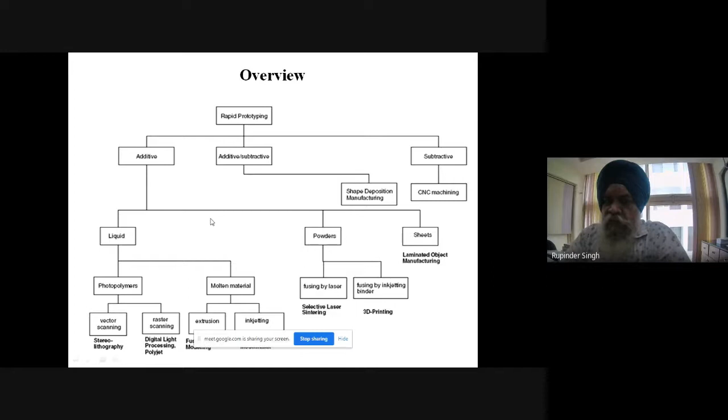These are some of the overlapped words, but basically rapid prototyping is categorized into three types. One is additive type, another is subtractive type, and the third is the combination of additive and subtractive, right? Let us say I am interested in developing some patch as a substrate for 3D printing. I can make it with some additive process. I can make it with some subtractive process, which is very common.

Subtractive means I have a larger block of material, like some of the imported materials we are working on, and I cut it according to my requirement. So that is subtraction, right? Or I can add some material layer by layer, joining it, or there can be the combination of additive and subtractive. So broadly, prototyping or rapid prototyping is subcategorized into three types: subtractive, additive, and combination of additive and subtractive. And there are a number of technologies further in these categories of additive, combination of additive and subtractive, as well as subtractive.

If I typically talk about subtractive manufacturing, which is quite common from the last 4 decades, this involves NC and CNC machines. I think all the engineering colleges or polytechnic colleges across the world are using this CNC or NC machining. Even the medium scale or small scale industry is working on this. Either I am interested in a mechanical product or in some hybrid product, electronics based, electrical based. This is very common, right?

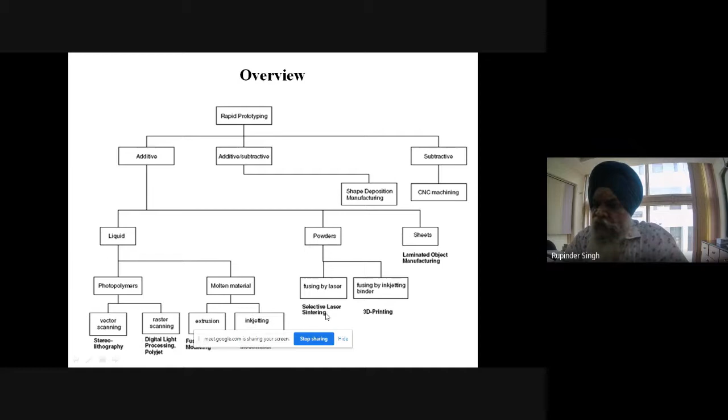If I talk about additive, it may involve technology based upon layer by layer deposition using some liquid base, some powder base, or some sheet base. And there are a number of technologies under this like stereolithography, digital light processing, inkjet printing, fused deposition modeling, selective laser sintering, LOM, laminated object manufacturing, 3D printing. So there are a number of technologies. And if you see broadly, we have more than 30 commercial 3D printing based technologies which are really competitive, and they have already defined applications, one or two, which can be really used for some typical applications, right?

So for the beginners, this is just the overview. In a typical 3D printing process, I have some data which is in the form of a CAD file. That file is given to some machine which I am calling a 3D printer. It looks like a photocopier, and the output of this 3D printer is a 3D printed object. Now, this 3D printed object can be a functional part, it may be a non-functional part, it can be used for n number of applications. Nowadays, I think there is hardly any field which is not using the benefit of this 3D printing.

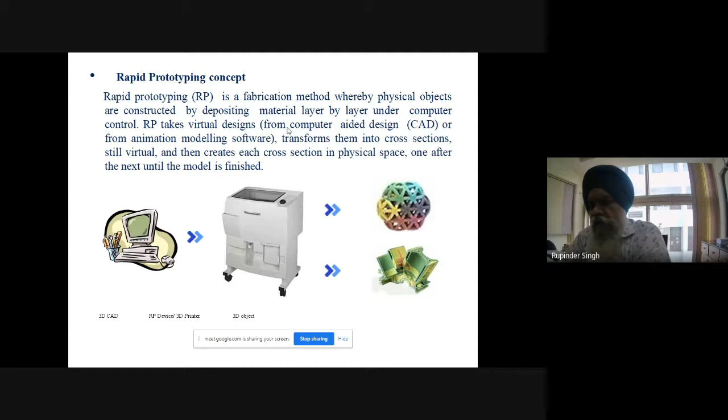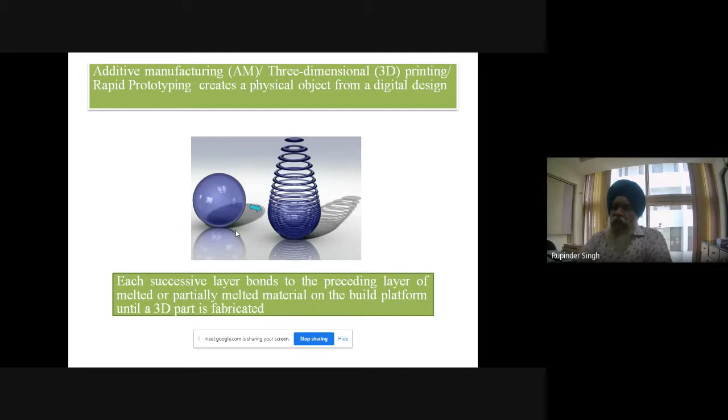So by definition, I have material deposition layer by layer using some CAD model, and then I transform this into some cross sections which are still virtual, and then these cross sections are deposited in a physical space one after another till I get a finished product. So this is another diagrammatical representation. So additive manufacturing or 3D printing is basically a digital design. I deposit layer by layer, and finally I get a 3D printed part. Here the successive layer bonds to the preceding layer, in partially melted or fully melted form. Then we have a build platform till we get a 3D printed part, right? So this is, I think, quite common. We are really comfortable with 3D printing.

Am I clearly audible, please? Am I audible? Dear friends, is it audible? Yes, sir. Yes, sir. Okay. You are audible, sir. Okay. Thank you. Yes, sir, audible, sir.

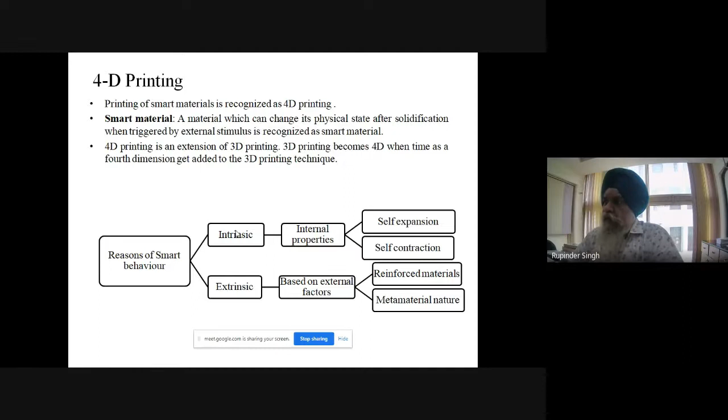Great. Okay, now we see the little extension of 3D printing that is called 4D printing. Nowadays we are even talking about 5D printing and 6D printing. Why am I talking about these? Because we are going to use these basic things for the development of some sensors, which typical electronics people call an antenna, right? Now, what is 4D printing? 4D printing is basically the printing of some smart material. This is basically 3D printing only, but the 3D printed part, under the effect of some stimulus, behaves in a way that it may grow, it may shrink, like that.

To understand this in a simple way, let us take the example of a sunflower. In nature, there is a sunrise, and the sunflower always faces towards the sun, and as there is a movement of the earth around the sun, the sunflower always faces towards the sun, right? So that means there is some stimulus which is in the form of sunlight.

So once that stimulus is put on that object, which is a sunflower, right, because of that stimulus there is some angular movement, there can be some up or down movement. Similarly, there are some flowers in nature which open up during the period of sunrise. So once there is a sunset time, again it closes down, right? So this is a very common feature. So that means nature is also inspired by different stimuli.

So if I select a particular material and a suitable stimulus, I can control the movement, I can control the dimension, I can control maybe the color, I can control maybe some other parameters like smell, something like that. So what we are interested in is, if I print some 3D component, and then as a function of time, as time is passing, I am using some stimulus. That stimulus is either helping it to grow or to expand or contract or change in color, change in angle, some angular movement can be there, right?

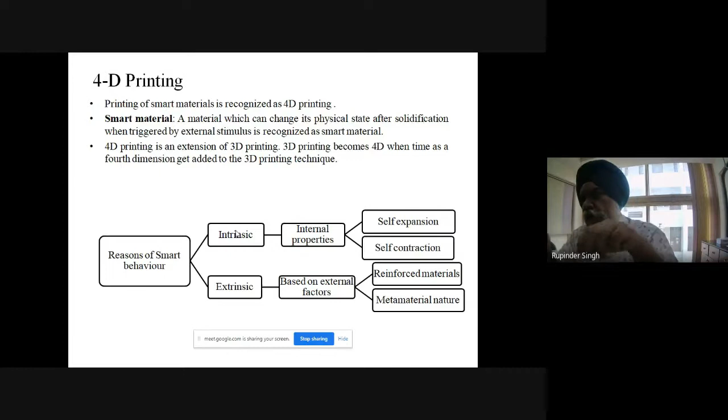Let us suppose I printed a 3D printed part. Now I apply a stimulus. The stimulus for this material is the voltage, right? So once I apply a voltage, this PVDF material is converting from alpha phase to beta phase. So what is alpha phase? Basically, it has a carbon-carbon chain, and alternately there are hydrogen and fluorine. So once I apply a high voltage, what happens? All the hydrogens are aligned on one side of the carbon chain and all fluorine on the other side of the carbon chain. So this conversion is called alpha to beta phase conversion.

So once there is alpha to beta phase conversion, there is a development of some van der Waals forces. And once we have that case, we experience that there is a contraction. So similarly, if you again change the voltage to zero, it will again get converted into the alpha phase. So I have a stimulus in this case as a voltage, right? So that stimulus for this material is converting the material from one phase to another phase.

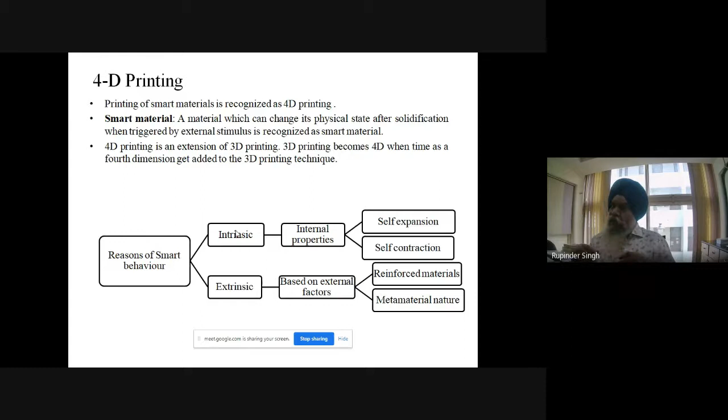Now just think of an antenna or a sensor where I can change the behavior. I can have a significant improvement in tan delta. I can have a significant improvement in its epsilon r, which will help in controlling the desired property of that particular sensor, right? So 4D printing is again printing in 3D only. After solidification, it is triggered by some stimulus, and we are getting some smart behavior.

So what I say, this is the extension of 3D printing, but we are interested in using a different type of stimulus. So what can be the reason for this smartness? There can be some intrinsic property of the material. There can be an extrinsic property. For intrinsic property, I have already explained the example of PVDF. In the case of the PVDF crystal, if you apply a load or a high voltage, it is converting from alpha to beta phase. That is the intrinsic property of the material, right?

Now, take another example. Let us say I am interested in thermal or electrical conductivity of polymers. That is actually not there, right? So suppose I want to add that property into the material. So what I do is some sort of reinforcement. I can reinforce graphene, I can reinforce some copper or aluminium powder, which helps me increase the thermal or electrical conductivity of the material. If we do something like that, this is basically increasing the property of that material through extrinsic means. So it is based on external factors. So the broad classification is intrinsic type and extrinsic type.

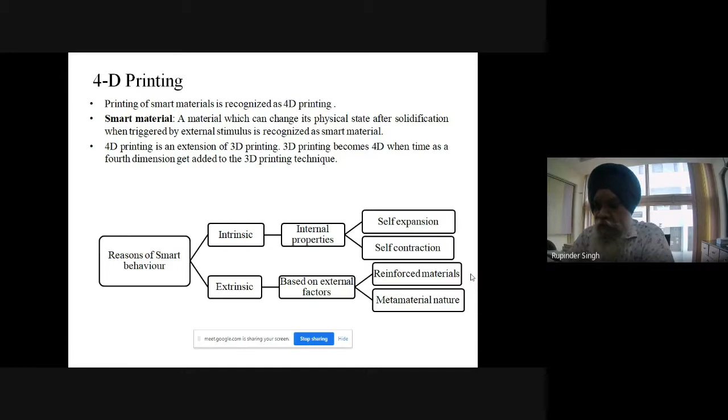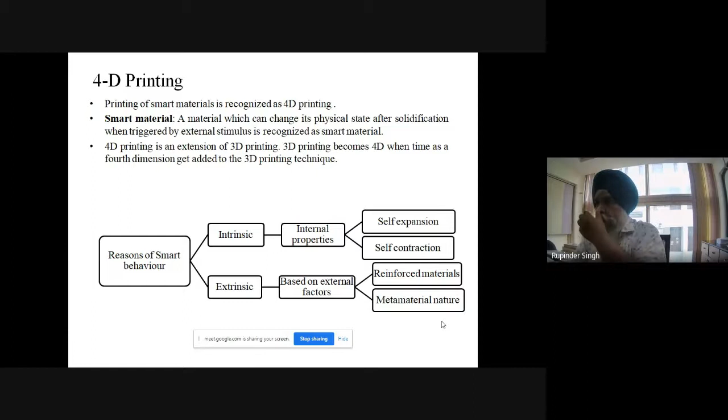Then there is another type of material called metamaterial. This may be a new concept for some of us, but it is quite common in civil structures. Metamaterial is basically an outcome of some angle and the length of the links through which some material has been developed or fabricated, and some component has been developed.

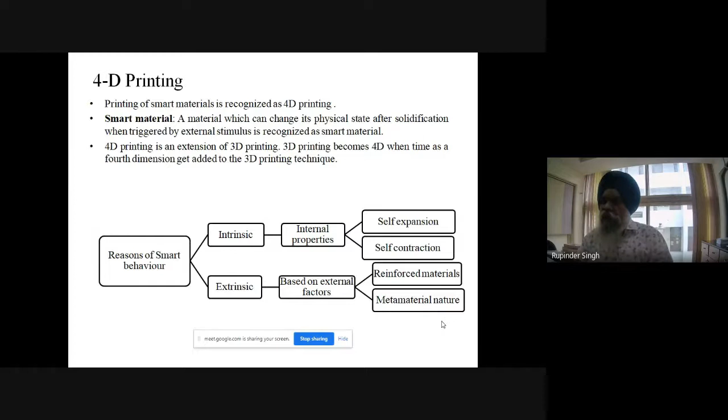Now the strength of that particular functional part is not because of the strength of the material, but how the material has been fabricated - what is the length of the link, what is the angle of the link. That is really important. Let me give you one example to understand this concept.

In some geographical locations where there is a lot of seismic movement and chances of earthquake, for the construction of multi-story buildings, they normally put in the basement some metamaterial mesh of material like titanium, which helps to absorb that large variation of earth movement, and the superstructure over it is basically safe.

There is a typical concept called origami structure - these are some Japanese concepts that have been used. Now the similar concept from civil engineering is being used for printing the functional part, so that it can absorb large vibration. Like you are interested in developing some sensor for high vibration applications.

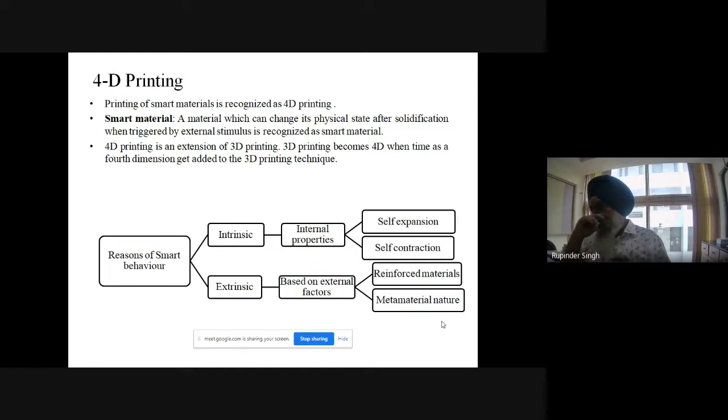With the effect of vibration, there should not be any disturbance in the transmission of the signal. So we can use a substrate which can basically absorb or dampen those vibrations better, and then we can think of using a concept like metamaterial.

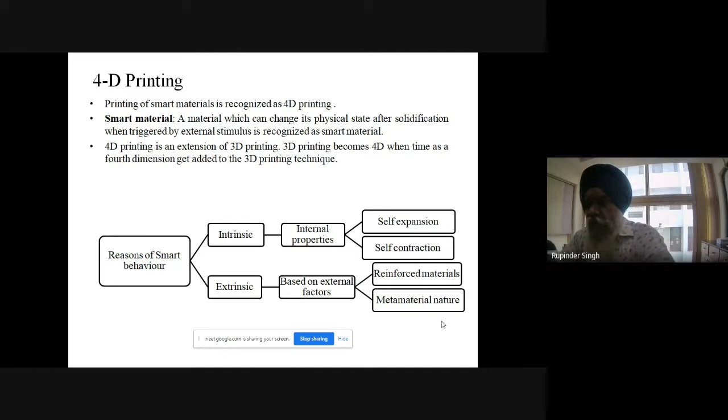So this is the broad classification of the 4D printed part. Now there is another important thing. Suppose I am interested in a 4D printed antenna - there is a concept of programming that particular antenna through the programming of the substrate.

Suppose I have a material, let's say this is substrate material for your antenna. I give some stimulus to it - it is converting from state A to state B. Then I give another stimulus, it is coming again to state A. This is called one-way programming.

There is another, two-way programming, like the material is in state A, you are converting it into state B, so I have a stimulus-on and stimulus-off type. Take the example, let's say the stimulus for some material is current or voltage. If I increase or decrease the voltage, the material converts from state A to state B, and this is reversible. If this is the case, we can use two-way programming.

Now the stimulus can be different. Let's say I'm interested in converting the material from stage A to A1, then A1 to A2, then maybe multi-stages. So I can have a single stimulus or I can have multiple stimuli.

Let us understand the application for this. Suppose I have some heritage structure and I am interested in getting real-time data that somebody is not damaging that structure, and every time I'm not able to be physically present. So I am putting some sensors in that structure. Let's say somebody is trying to harm that structure by applying some load or force - that will act as a stimulus.

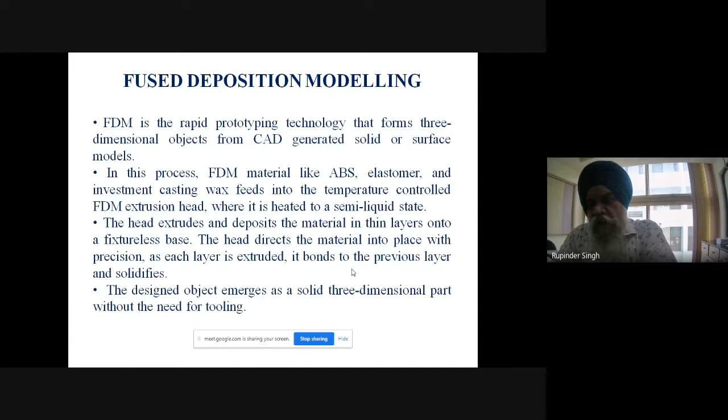So this is one of the commonly used technologies called fused deposition modeling. This is one of the most popular technologies, the reason being the cost. The cost of this technology starts with 10,000 rupees only, so you can have this on your desktop.

So the process is very simple. I have a polymer material, thermoplastic material, put in the form of a spool. This spool is fed into a liquefier chamber, and from there the material is deposited layer by layer. If you see the commercial printer, the diameter of this feedstock filament is normally in the range of 1.75 mm, the most commonly used size, but commercially these are available from 0.4 to 4.0 mm.

Once this feedstock filament is fed into the liquefier chamber, there is a nozzle, and through this nozzle the larger diameter is converted into a smaller diameter. Depending upon the nozzle, you can have output of 0.2, 0.4, sometimes 0.25 mm. So what we understand is the thick wire, or higher diameter wire, is fed through some mechanism into the liquefier head, and then I get a fine strand of wire.

This fine strand of wire is produced because of the high temperature as well as the mechanical feeding, just like an extrusion type mechanism. So I get layer by layer deposition, and once the part is built, the Z axis moves down, and I get a 3D printed part.

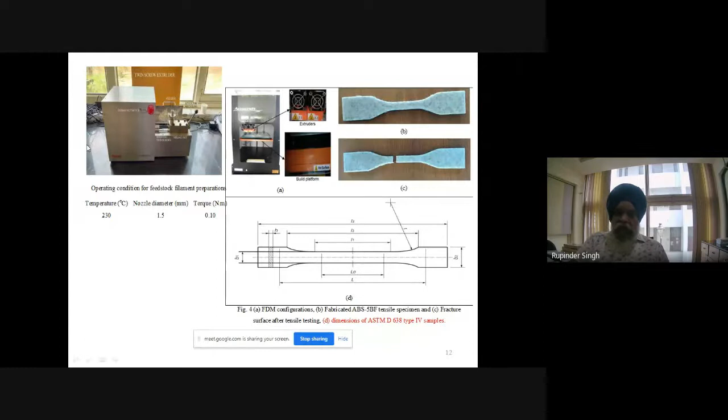So this is the setup. This is a tabletop extruder, which we call a twin screw extruder. This is from a German-based Thermo Fisher company, which makes this extruder. Here you can see I have two screws, then some manhole from where I can put the material. There is a heating chamber, and on this side the wire will come. So I have input control of the temperature. This is a totally computerized control machine. I have control of the nozzle diameter because I am interested finally in the diameter of the wire. I can control the torque and the RPM.

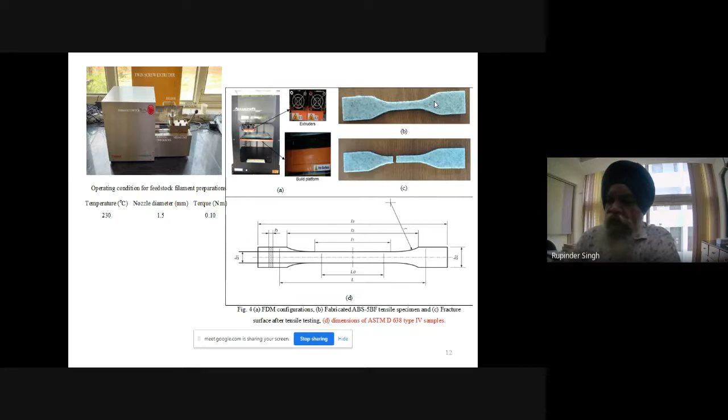So in this section, we will be preparing the feedstock filament, which will be fed into the 3D printer. This is a typical low cost 3D printer, and I am interested in making some tensile coupons. Why have we made these type of tensile coupons? Basically, these are as per ASTM D638. So once you have to compare some functional prototype, these have to be as per some standards. These have been prepared using this type of reinforcement.

Now this is really important to understand from a typical sensor application. This is basically a DSC based thermogram. DSC is a differential scanning calorimeter. I am interested in understanding to what temperature this type of material will be thermally stable.

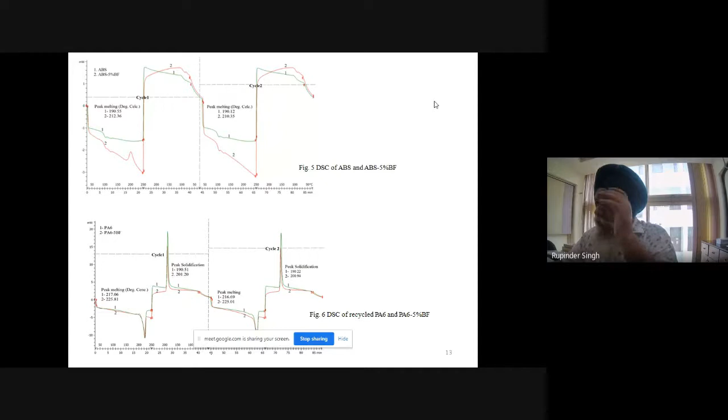To understand in a simple way, let me give an example. Suppose I go to the market and purchase two plastic buckets. One bucket I put in my bathroom, and the second bucket I put on my rooftop. The bucket in the bathroom will work quite good for a couple of years, maybe more. But the bucket on the rooftop may develop some crack, maybe after a few days. The probable reason may be the excessive heating cycle and cooling cycle. In the daytime, because of excessive sunlight, there can be some thermal deformation, and similarly in the night time there is a sharp change in temperature, a low temperature.

So because of that heating-cooling cycle, there can be thermal deformation. Now just imagine I have developed some antenna with a polymer substrate which cannot withstand the temperature variation in that region. That antenna will have disintegration as regards the structural component, and finally I will get incorrect or improper RF characteristics. So before using this type of material for substrate application, we are really interested in their thermal stability.

So you can see along the x-axis, I go from room temperature to 250, first heating. Then from 250 to room temperature, this is cooling. Then room temperature to 250 again, heating. Then 250 to room temperature, cooling. So basically a heating-cooling cycle. It is recommended that to understand a particular material or composite we have developed, we must go for a minimum of 3 cycles. Also along the axis you can see some time lapse.

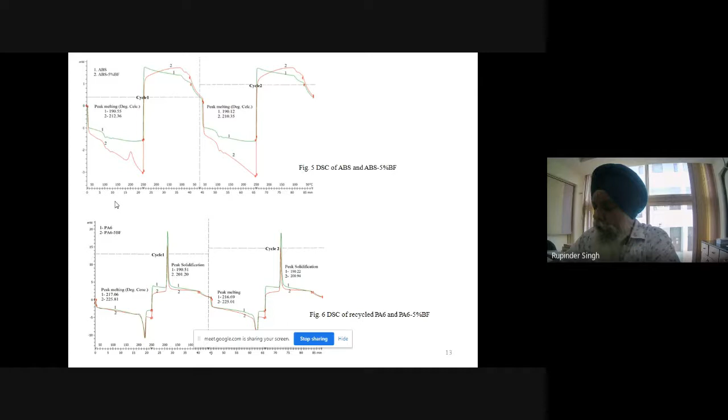On the y-axis, what I am getting is the energy absorbed by that material in joules per gram. Once I am exposing my substrate to some temperature, it is absorbing some heat in the heating cycle and releasing some heat in the cooling cycle. If the heat absorbed and the heat released are almost near each other, we say that this material is thermally stable to work in that particular range of temperature, in that particular environmental condition.

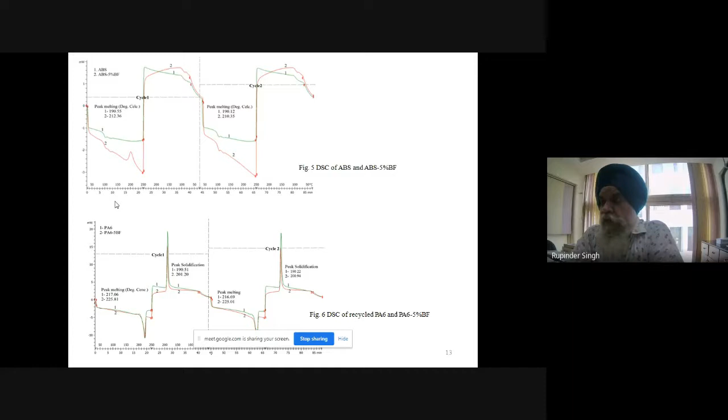So this is really important for a sensor application. For that particular range where I am using, that material must be thermally stable. Otherwise, my performance will be really compromised. Now you can see here, once we were using an ABS material, this is the curve for the ABS material. The maximum peak temperature earlier was 190, right? And once I put the banana fiber into it, this was increased from 190 to 212, right? So that means the thermal stability of the material was increased for another 22-degree rise in temperature, right?

And once we observe that in the second cycle also, this was almost similar. So 190.55, 190.12. So from the typical thermal engineering application, we consider this material as quite stable. So that means with the addition of the banana fiber, the thermal stability was not compromised, right? And in the repetitive cycle, I am getting a similar type of results. And secondly, now the peak melting temperature is increased, so I can use that substrate

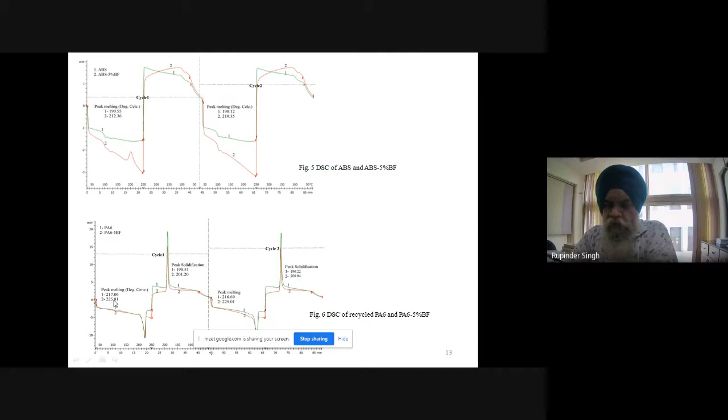for relatively higher temperature. Similarly, the trend was observed for the other substrate, that was polyamide, and polyamide reinforced with banana fiber. So you can see earlier with the virgin material, single material, it was 217. Now it is 225. So similar trend was observed in the second cycle. We are interested to see in repetitive cycle whether the thermal stability is there, and in heating and in cooling, if it is absorbing the similar range of energy in the heating cycle, and almost similar is being released in the cooling cycle, we consider that this is a thermally stable material.

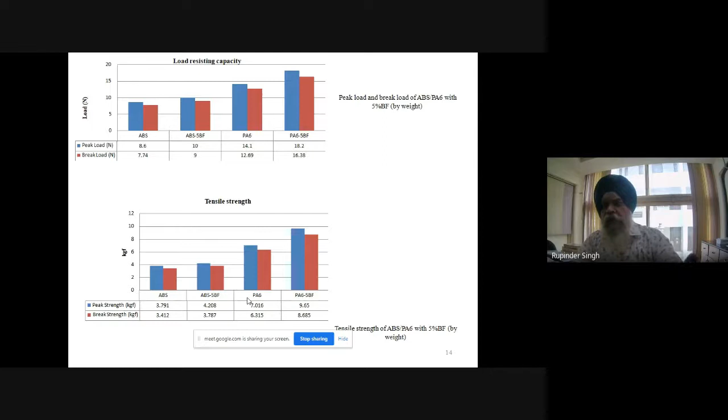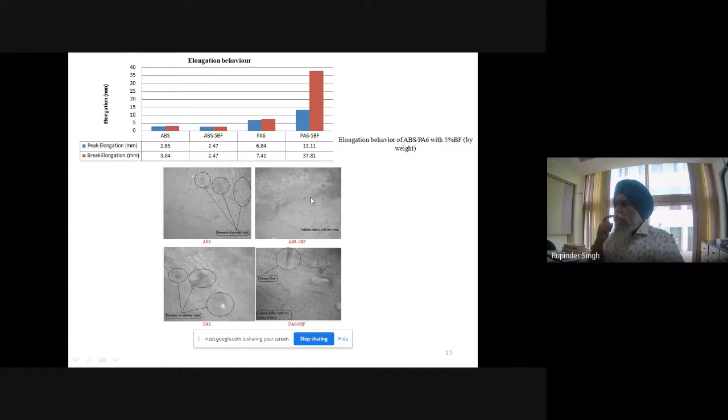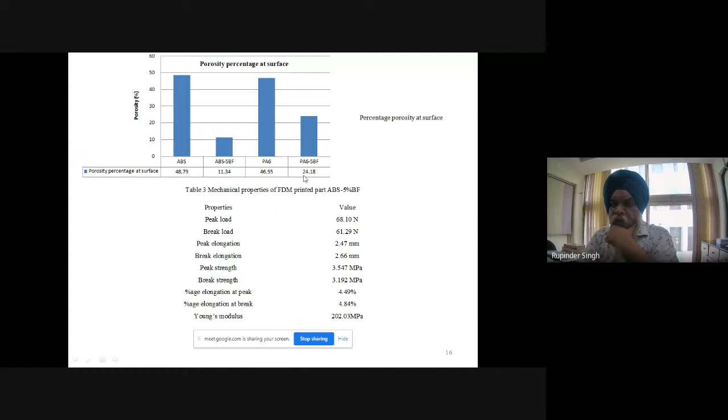So porosity with the different level of reinforcement, you can see earlier it was 48, with banana fiber this was reduced to 11, and in case of polyamide it was reduced to 24, right? So this is really an advantage in terms of mechanical property, in terms of the porosity, because this will be helping us in the final gain of the antenna, right?

So this is one basic example as a case study that I have explained to you, how we can print, how we can make a substrate as a functional prototype or the non-functional prototype. Functional prototype means that can be actually used for some application. Non-functional is just for the demonstration purpose.

Now I'm interested in using a combination of material through which I can have a different level of stimulus, and with that stimulus I am interested in some 4D application. Now how we are making this? This is one of the patents lying with us. We have used the simple physics principle. Now you can see over here, in this case, I have a multiple layer printing. This blue color layer is a non-conducting layer. This is a conducting layer. This is a non-conducting layer. Then the conducting layer, and then the non-conducting layer.

So just imagine, I have a thermoplastic spool. Let us say I printed the layer of the ABS, which is basically non-conducting. Non-conducting means thermal and electrical conductivity is not there. Then what I did is I reinforced the graphene and the copper into the ABS, and I printed a second layer. So once the graphene or the copper is there, there will be conductivity. Then I have a third layer where again I have an insulating layer. Then I have another layer where I have a conducting one. So I am interested in printing multiple alternative conducting, non-conducting layers, right?

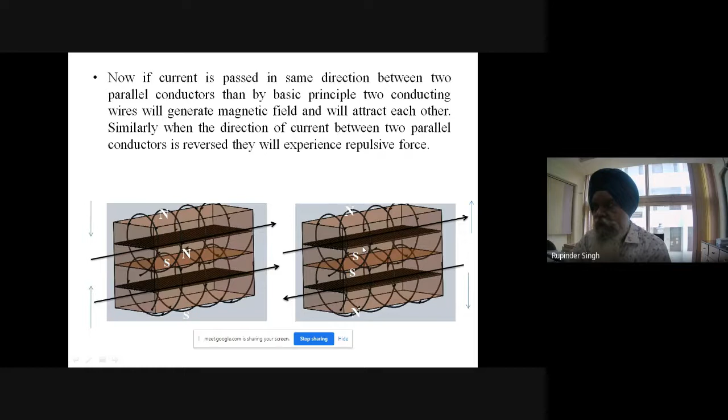Now if I am interested in expanding that part, I am basically changing the direction of the flow of the current. So here will be north, here will be south, here will be north, here will be south. So this south and south will repel. Now once this will be the case, I can basically use one stimulus, which is a current, and the direction of the current, to either expand or contract my substrate.

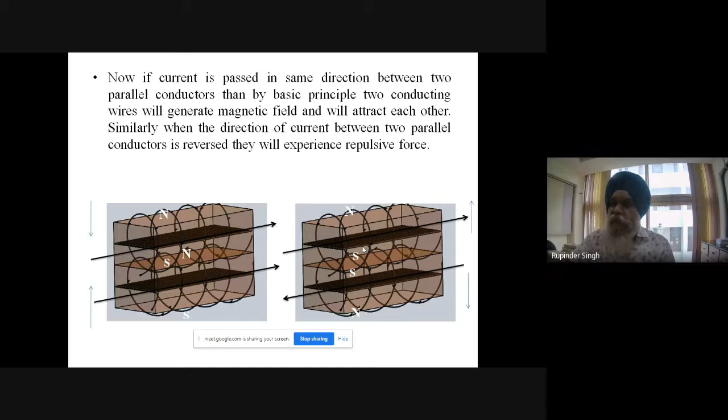Now just imagine I am changing the direction of the current, value of the current, intensity of the current through some microcontroller, and my substrate is expanding or contracting. Once it is expanding or contracting, it will have a serious effect on my RF characteristics, right? So my typical sensor applications through this stimulus are controlled, and this is going to help me to make a 4D printed antenna. We are actually using this concept in typical heritage structures. I will show you in coming slides. There are some other applications where we can actually use this for sensing purposes.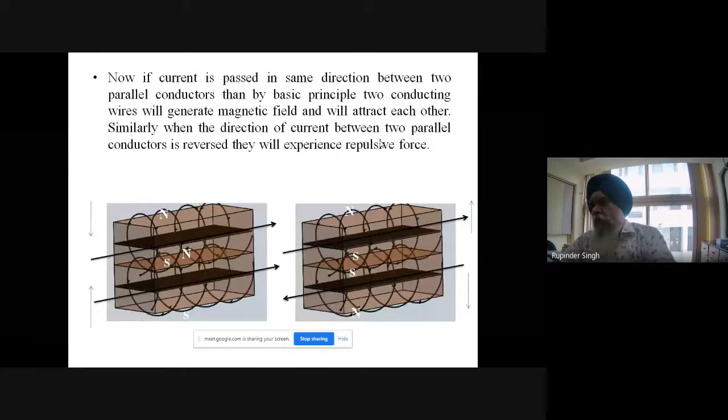Now, one of the typical applications I'm trying to describe over here. You see, this is a setup for the ultrasonic machining of hard and tough material. On the top you can see there is some electric input, then there is a transducer. This transducer is basically converting the electric input into the mechanical output, right? So now we can use this particular concept of developing our own transducer. This transducer is being controlled through some controller. I am just changing the direction of the current, right?

Now if you see these commercial transducers, these are piezo based, right? But I can use a magnetic based transducer and can work at much higher temperature conditions. Then some vibrations are produced because of the transducer. Then I have some design of this section where I can use a mechanical amplifier. Then there is a sonotrode. At this junction I am getting the output in the range of 20 kilohertz, so ultrasonic vibration. At this location, I am putting a tool which has been fastened to this surface. So this tool is now vibrating at the frequency of 20 kilohertz.

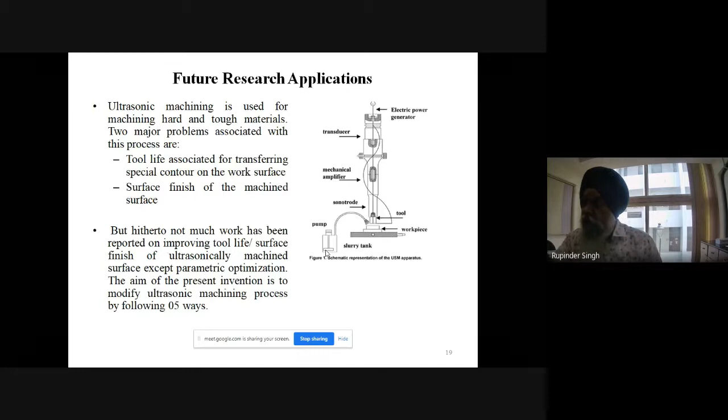Now there is a workpiece over here, and there is a gap between the tool and the workpiece. I am putting the slurry in between the tool and the workpiece, and once the slurry particles, comprising alumina or silicon carbide, come in contact with the tool, because the tool is vibrating at a high frequency of 20 kilohertz, their momentum is increased to 2.5 lakh times. With that high momentum they strike the workpiece, and we get erosion over the surface. So I get a cavity. Basically, the replica of the tool is generated in the workpiece. So this is the conventional process.

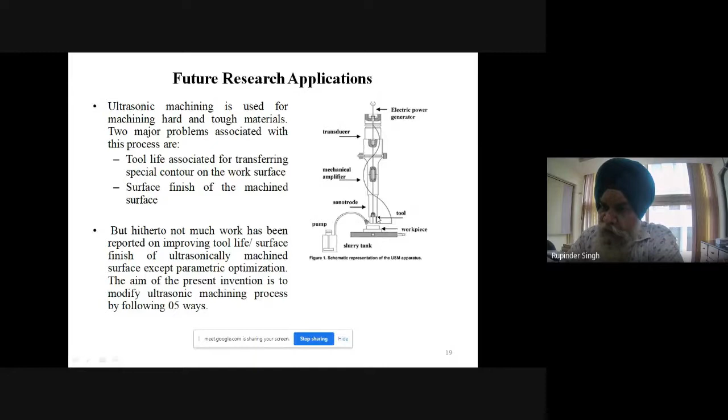What we can do is make our own transducer, number one. Then we can also think of doing some hybridization at this end. Actually, what we have done, this is the tip of the tool. We segregated this section into three parts. The first part was the roughing zone, the second part was the semi finishing zone, and the third part was the super finishing zone. We printed a thermoplastic strip in the starting part, the roughing zone, where we used coarse grains of alumina. Then in the semi finishing zone we used relatively fine grains of alumina, and in the super finishing zone super fine grains of alumina.

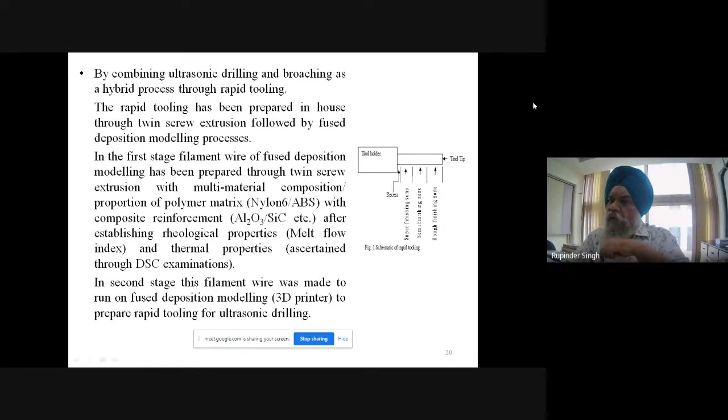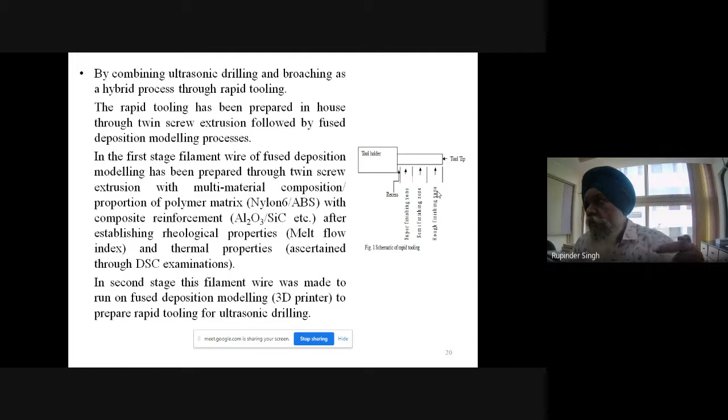Let us say in the starting section the grain size was maybe 100 microns, in the middle section 80 microns, and in the super finishing section maybe 50 microns. Now the tool is moving with a high frequency and getting in contact with the slurry particles, and the slurry particles are moving down. Then the wall of the hole being created first comes in contact with the rough section, then the semi finishing section, and the super finishing section. So there will be drilling as well as a sort of broaching together. So this is the hybrid process. In this way we can control more than one process simultaneously.

So this is one of the basic mechanical advantages of making these types of components. Now, typical for the substrate application in the antenna, you see, we have a nozzle through which some thermoplastic is coming out. So my nozzle is circular. So once the feedstock filament comes out of this nozzle, it will result in an elliptical part, right? So once I have a circular nozzle, the outcome is in the form of an ellipse, right?

This is basically because of the Barus effect, right? So there is an established reason for the conversion of the circular nozzle outcome into the ellipse. So once there is an outcome like this, I am depositing my material layer by layer, right? So once I am depositing my material layer by layer, there will be an air gap. So you can see over here, right? In typical printing language, we call it the staircase effect. Now this adds to the porosity.

So once you have porosity in your sample, this will have a serious effect on the application as far as the sensor is concerned, because high porosity will really affect the epsilon r and the tan delta, right, for your gain in the final antenna application.

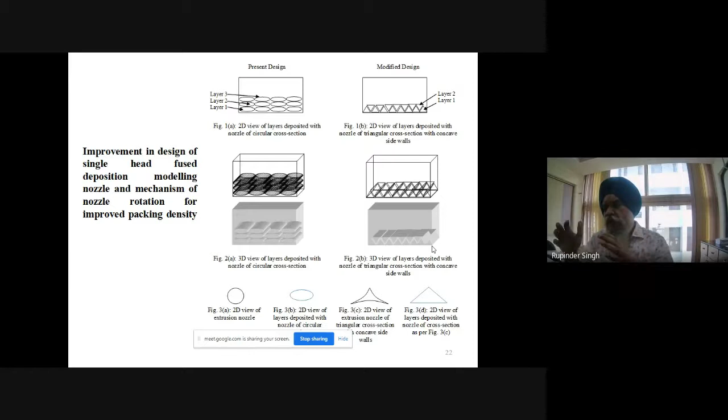So once I am printing the layer, see, this layer will be something like these triangles. Now when I deposit the second layer for my substrate, this will be like an inverted triangle. There is a stepper motor which changes the layer direction, so we get a better condition where the air gap is better filled, right?

Actually, we were inspired for this technology by the color television. This technology was initially introduced in the color television by Sony in the mid 80s. In a typical color television, we have a silver screen, and on that silver screen, electrons are bombarded from some distance. So once there is a bombardment of electrons on the silver screen, there is a formation of pixels. The combination of pixels helps us to understand a particular picture.

So Sony came up with a technology in the mid 80s where the pixels were not circular, but like a triangle. The idea was that the standoff distance between the gun and the silver screen, the angle at which the electrons are bombarded, and the speed, all in combination help us to get an outcome in the form of a triangular shape.

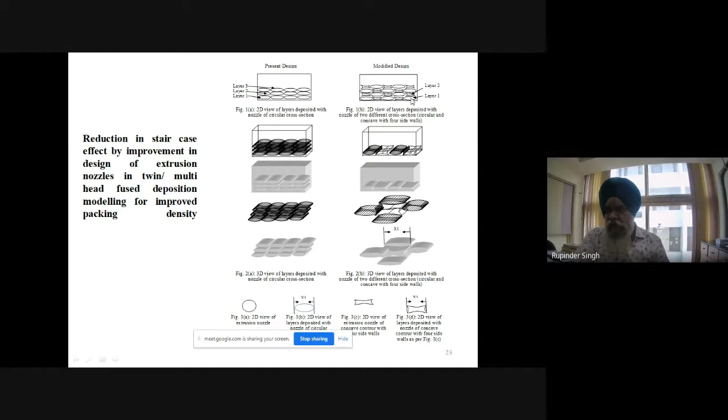Now this is another case. If we are interested in controlling the substrate in a better way, we can think of a combination of nozzles. So I can have one circular nozzle and another nozzle, something like this. So the final combination will be like this. This is helping me to control the staircase effect in a better way.

I can even think of nozzles printing in parallel, maybe two nozzles. I have seen a printer where 10 parallel nozzles were printing simultaneously. So I can increase my mass production in that way.

Okay, now a typical example I'm trying to share with you is for the heritage structure. This is one of the heritage structures where we are using this for the sensing application, right? This structure was built in 1902. You may know that as per CPWD, we have the categorization of structures as grade 1, grade 2, grade 3. Normally, grade 1 structures are those of international importance, like the Taj Mahal.

Then there are the grade 2 structures which have national importance, and these are controlled by the Archaeological Survey of India. These are under state control or government control, the respective Government of India or state government control.

Then we have the grade 3 structures, which are basically not controlled by the government. These are normally private structures, but they have some importance as regards the development of society in that particular region. For basic experimentation, we selected this grade 3 structure, because otherwise you have to take a lot of permissions, and it is really difficult to get these types of permissions.

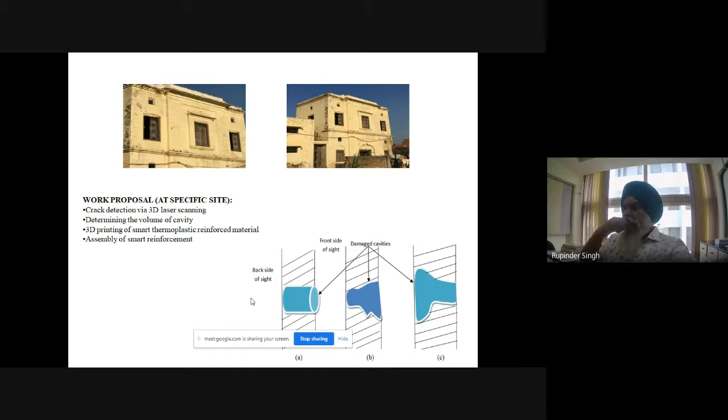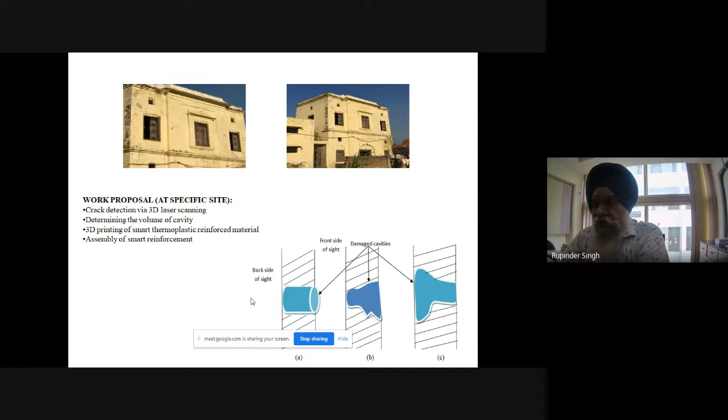So this is another heritage building. Its name is the Sarai Lashkari Khan, over which we are working from the Government of India and Government of Punjab side under the SHRI project of DST. Now to put my point, as multi-material substrate printing, this is an example. We selected three different materials. One is HIPS, high impact polystyrene, another is ABS, and the third is PLA.

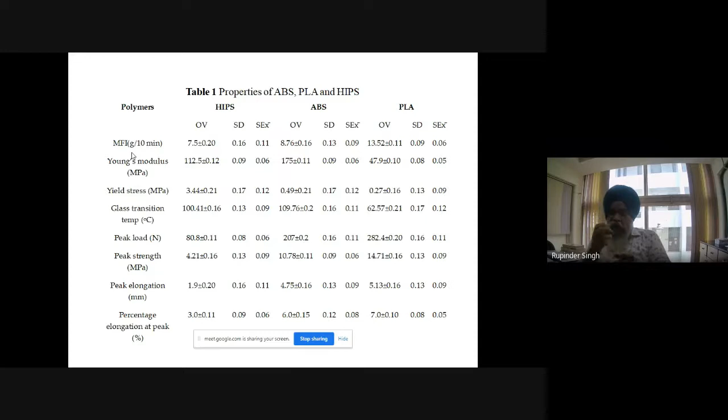Now you see all these three materials have a wide difference in their MFI. MFI may be something new for some of us. Basically, we are interested in finding their melt flow index. There is a standard, ASTM D1238, which suggests that if I put some defined quantity of the polymer into a barrel, then apply a load, normally 2 to 3 kg, at a particular temperature, then it is extruded into fine wire form, and that fine wire I am using to print layer by layer over some surface, right?

Now if this is the case, that fine deposition of the wire layer by layer is helping me to construct some part. If the MFI is more, I can make a thin section. If MFI is less, I cannot make a thin section, right? So if you see the difference in the observed values, for HIPS it was 7.5, for ABS it was 8.7, and for the third case it was 13.52. That means if I am working at the same temperature condition for printing the substrate of HIPS or ABS or PLA, right?

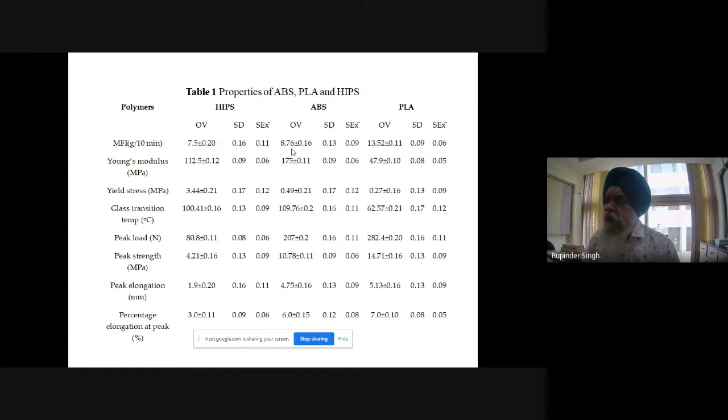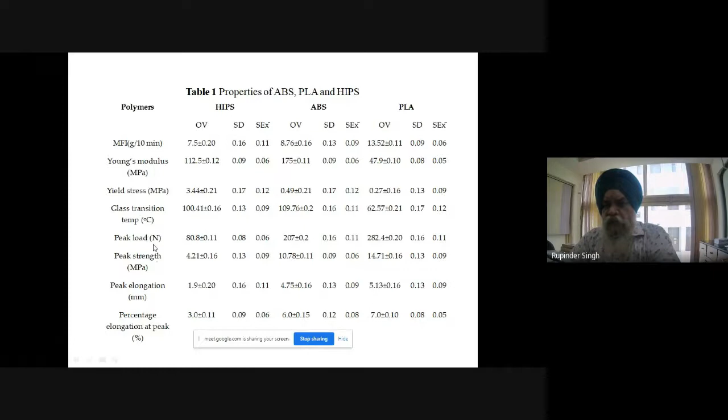Then PLA substrate will be more fine as compared to the ABS and the HIPS. Now similarly, you can compare the properties like the Young's modulus: for the HIPS it was 112, for the ABS it was better, 175, and PLA was the poorer. Similarly, we have the observation for the yield stress, the glass transition, peak load, peak strength, peak elongation. So these types of properties we observe once we select a particular substrate material for printing, right?

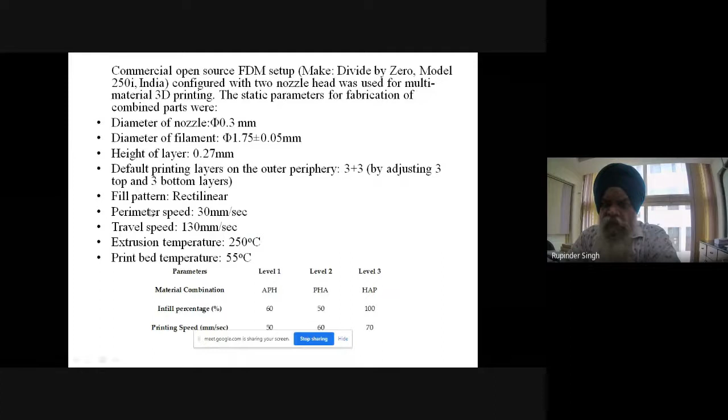So then we printed on an open source 3D printer. We have fixed some parameters like the dia of the nozzle, dia of the filament, layer height. We can fix the layer height. Then by default, how many bottom and top layers we are going to use. Then the infill pattern, at which pattern I can infill. Then the printing speed, perimeter speed, travel speed, extrusion temperature. There are around 15 plus parameters that I can play with on my software, right?

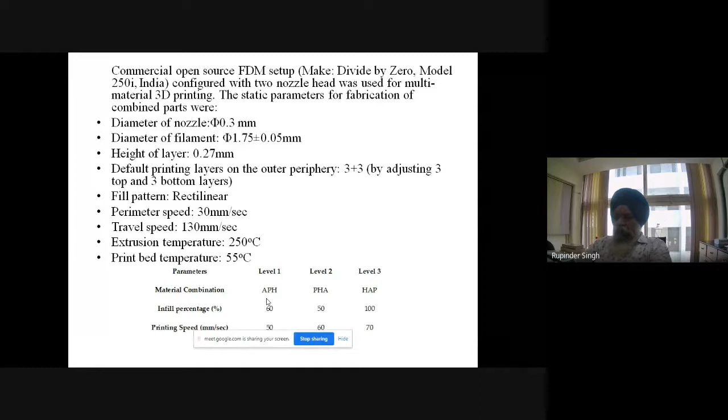So some of the parameters we kept fixed, and some of the parameters we tried to vary. What we did in this case is we varied the material combination, the infill percentage, and the printing speed. In the material combination, like APH: APH means the lowest layer of ABS, then the middle layer of PLA, and the top layer of HIPS. So we tried to see, if I print that substrate as a multi-material, how it is going to behave.

Once we see this for PLA, it was taking 14.71, but it was coming out with 10.80. So there is a serious threat to its thermal stability, right? Then for HIPS, it is taking 11.7, and the output in the cooling cycle was 10.8. So it is better than PLA. So PLA was the least thermally stable material. We tried to see this effect from room temperature to some high temperature.

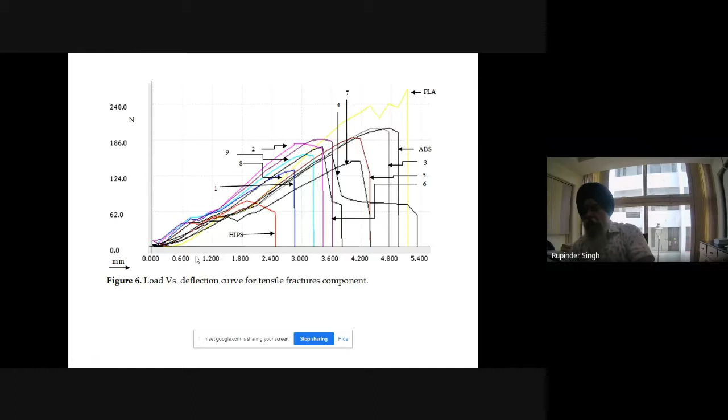Now, if you compare figure 4, the lowest was PLA, intermediate was HIPS, then the ABS, there was no side flow. If I compare their mechanical properties, curve 1 had a minimum area under the curve, so it will have a minimum modulus of toughness. Whereas for curve 4, the area under the curve is really large. So this is another important observation: which material I have to print at the top, which at the bottom, and I can select their combination. This combination is really helpful in printing some components. Now I'm going to tell you quickly how we will control the multi-material printing.

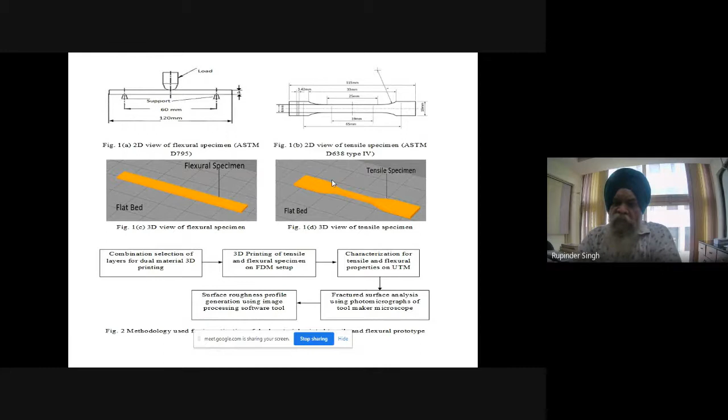So again, like the previous case, some of the samples have been printed in the form of tensile coupons as well as flexural coupons. Here we selected two materials: PLA and ABS. I fixed some of the parameters of the fused deposition modeling printer, like bed temperature, nozzle temperature, infill percentage, infill speed, number of perimeters, raster angle, layer width, and number of layers. These parameters were kept fixed.

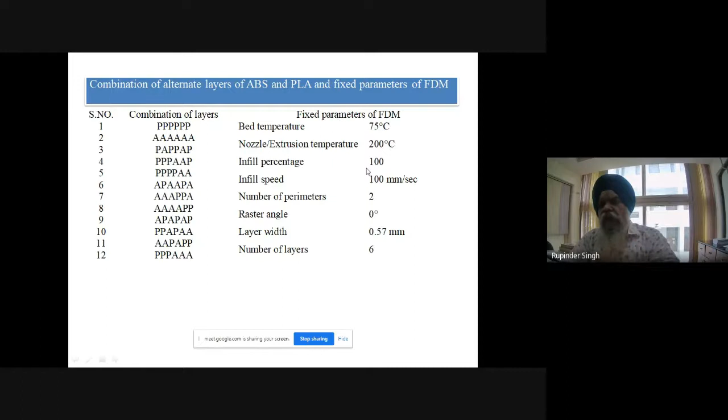Since I had to put 6 layers, we used the concept of random numbers. Initially all the layers were of a single material, so all 6 layers were PLA. Then in another experiment, all 6 layers were ABS. Then at random we selected combinations like first layer PLA, followed by ABS, then PLA, PLA, ABS, PLA. Without following any design of experiment, we observed the effect of different layer combinations. These are some of the samples that were printed.

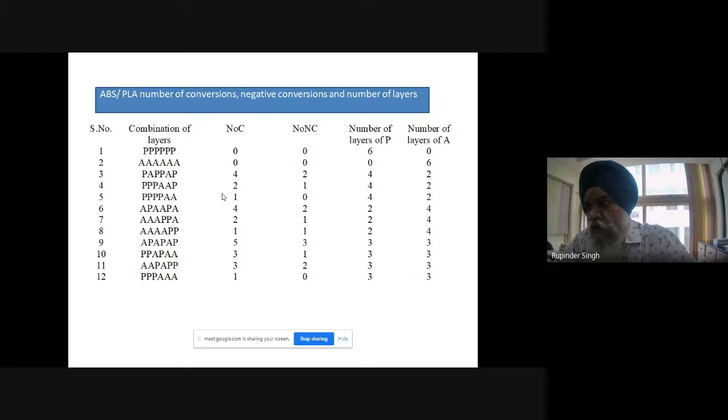We introduced, for the first time in the area of additive manufacturing, the concept of number of conversions and number of negative conversions. If I control the number of conversions and number of negative conversions, I can predict the porosity, I can predict the strength, I can predict the behavior of that substrate under a defined loading condition, and how this affects the RF characteristics, which we can also control.

In this case, all the layers were of a single material, like P, P, P, P, P, P. So all were of a single material, so there is no conversion. Conversion means conversion of material from one to another. So all being PLA, the number of conversions is 0, and the number of negative conversions is also 0. So there were 6 P's and no A's.

Then in the second case, all were A's, so number of conversion is 0, with 0 P and 6 A. Now consider case number 3: material converts from P to A, that's the first conversion. Then A to P, second conversion. Then no conversion. Then P to A, third conversion. Then A to P, fourth conversion. So there were 4 conversions.

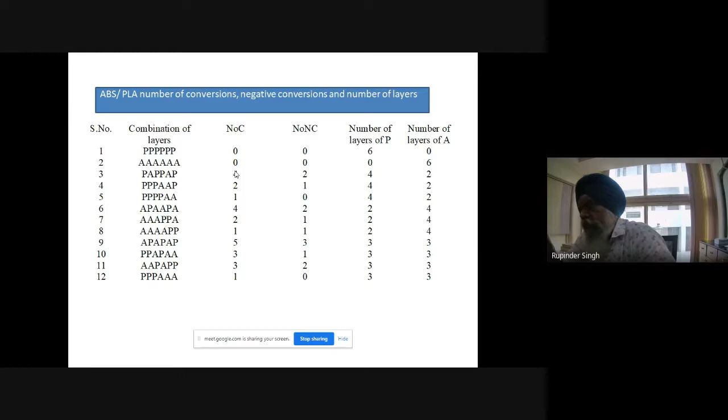What is negative conversion? If I am depositing ABS first and putting PLA over it, the PLA will have a side flow because of the difference in glass transition temperature of the materials. So if ABS is at the bottom followed by PLA, there will be a side flow of the material, which we call a negative conversion. In this case, P to A is non-negative, A to P is one negative, then again A to P, two negatives. So there are two negative conversions. How many P's are there? 1, 2, 3, 4 P's. And how many A's? 1 and 2, so 2 A's.

Let us take another example at serial number 10. P to P, no conversion. P to A, 1 conversion. A to P, 2 conversions. P to A, 3 conversions. How many negative? There was only one negative, because only one time was PLA printed over ABS.

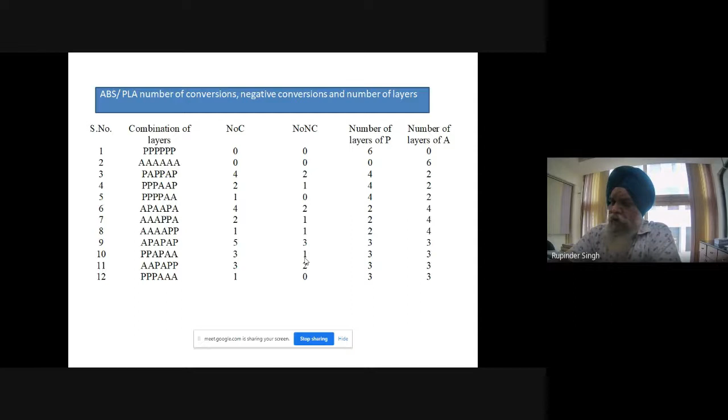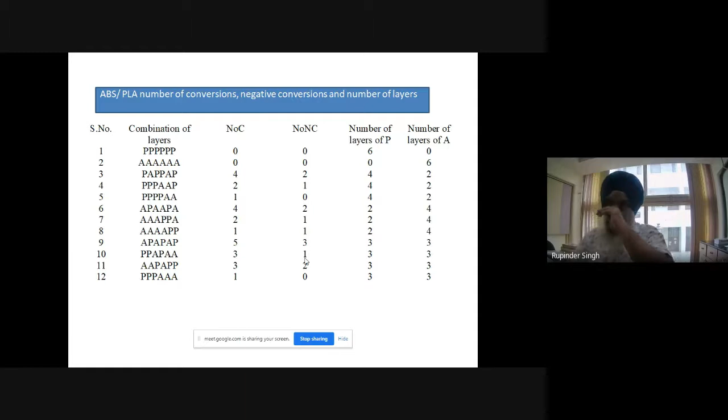So what we observe is that if we have a combination of P's and A's, there are number of conversions and number of negative conversions. If I am interested finally in the strength of the material, the number of negative conversions should be minimum, followed by number of conversions, followed by P and followed by A. That means, if you are interested in dual material printing of your substrate from a strength point of view, based on the experimental data regarding mechanical property and porosity, A should be more, followed by P, followed by number of conversions, and number of negative conversions should be minimum.

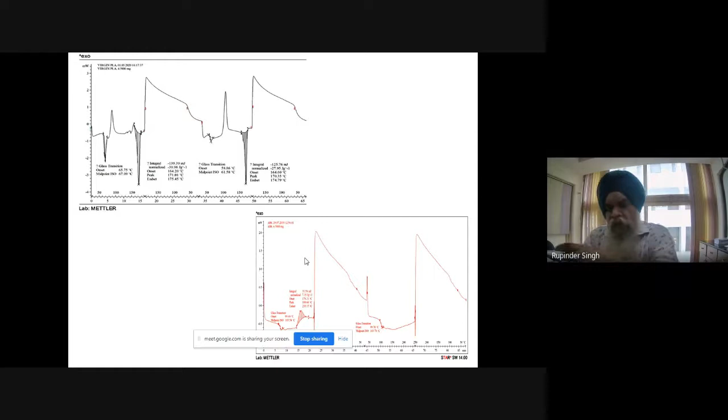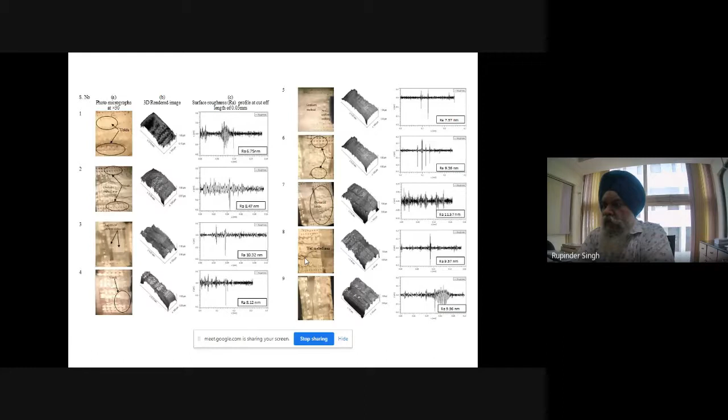Now this is another example for the 4D printed part where I can use some of the samples. Like I have already explained, I can use a stimulus like a magnetic field, a stimulus like a load, or a stimulus in the form of light, electromagnetic field, chemical energy, or temperature, or a combination of stimuli, like a hydrothermal stimulus. So that actually creates some variation in this material.

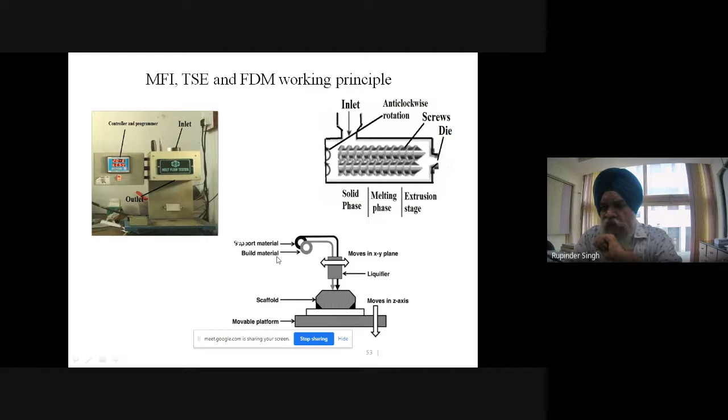So once I control my MFI, then I put my material in the extruder. Once the material is fed over here, there is an intermeshing screw, and finally I get a feedstock filament. That feedstock filament, or wire, I put into my 3D printer, and I get a 3D printed part. In this particular example, I have selected PLA as one material, PVC as the second, magnetite powder as the third, and wood dust as the fourth material. I am interested in reinforcing these four for making a hybrid substrate.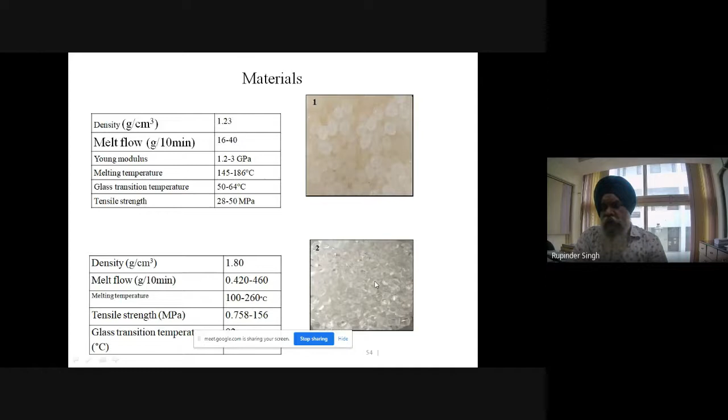So PLA is basically used because of the biocompatibility. PVC, again biocompatible, adds strength. Fe3O4 magnetite powder is basically to have the effect of the magnetic stimulus, and this wood dust has been used for the insulating property and as a replacement of wood or timber. So the reason is there.

So we tried with different combinations. We used it on an extruder and tried to optimize some of the parameters, and we try to see their magnetic properties, the typical BH curves. We are interested in their magnetization - magnetization means how easily I can magnetize that material. Then coercivity, right?

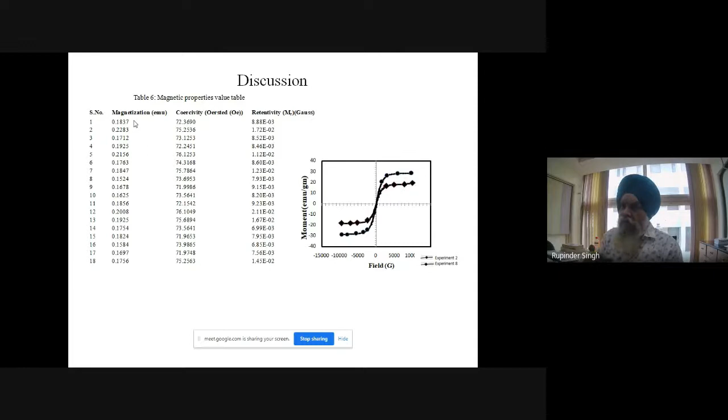If I am interested in making the effect of the magnetic field zero, then in the opposite direction I have to apply the magnetic field. So how much in the opposite direction do I have to apply the magnetic field? So we measure the coercivity, and once I switch off the magnetic field, how much magnetic effect will remain? That is in terms of retentivity. So we try to measure this for this type of combination of material.

We did some parametric optimization, some SEM analysis, some EDS analysis, and tried to see their effect on the melt flow index by putting different proportions by weight - 10, 15, 20, 25% - and similarly with different variations of Fe3O4 and wood powder, and tried to see the effect on their mechanical properties. Like for the virgin material, what was there, then with the level of reinforcement, what is the change in their peak load, peak elongation, break elongation, peak strength, break strength, Young's modulus, then their stress-strain value. We try to develop the stress-strain curve, and try to see the effect on the hardness.

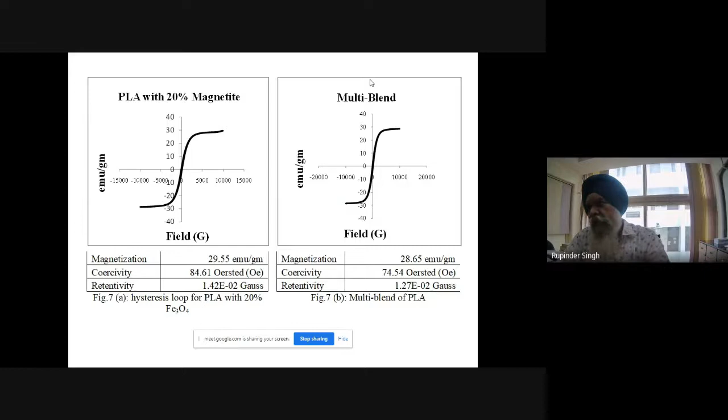Then their thermal stability, like the previous case, then in case of the hybrid and multi-blended material substrate that we are getting, how much effect of the stimulus will be there. So we try to see through their BH curve. So this is the way we can make a 4D printable material, but only the difference is the effect of the stimulus.

Then we try to see the effect of the stimulus, that is the VSM, vibrating sample magnetometry, which we use to measure the coercivity, retentivity, and magnetization with different reinforcement of graphene. So how will this substrate behave once it experiences this effect?

Now the application part, there is another example. We use a smart material, PVDF, and to increase its piezo property as a smart material, barium titanate and graphene were reinforced into it. So we tried initially with 98% PVDF, and put some graphene and some barium titanate into it.

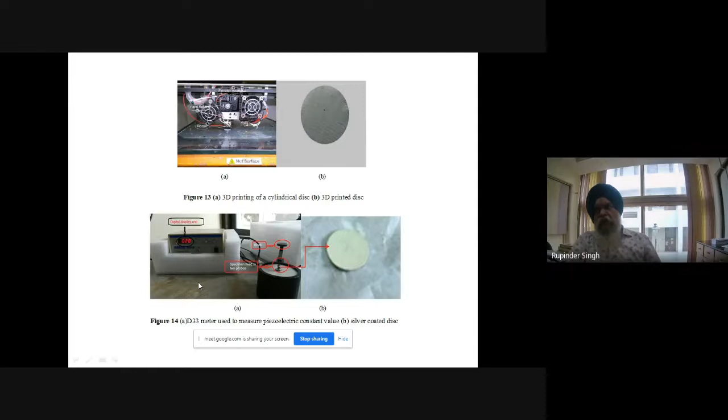We did some parametric optimization and tried to see the effect on peak strength, break strength, modulus of toughness; the stress-strain curves were observed, and thermal stability values were observed. Then we tried to print the component and see the effect on the piezoelectric constant. D33 was measured, and we were able to get around 20 picocoulomb per Newton, which is very good for the self-sensing application.

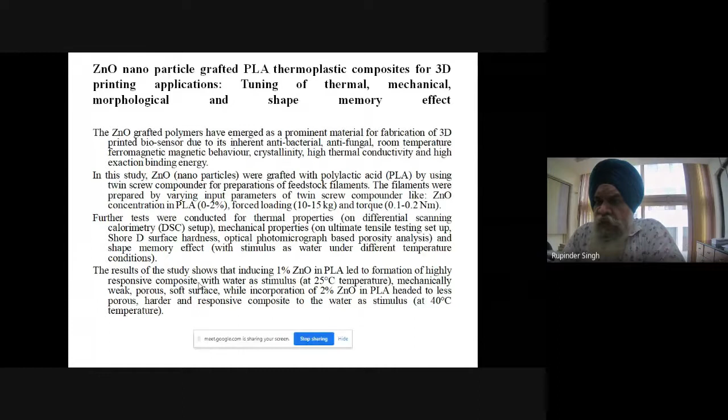There is another example, typically for sensors. ZnO nanoparticles were reinforced into PLA, and we are interested in their thermal, mechanical, morphological, and shape memory effect. Now this will be more clear from this picture.

So I have ZnO nanoparticles that were put into the extruder, and some feedstock filament was prepared. That feedstock filament was put into the printer for printing some components. This is the picture for the thermal stability value. Once I add ZnO in different proportions, 1%, 2%, I can tune this material for better thermal stability.

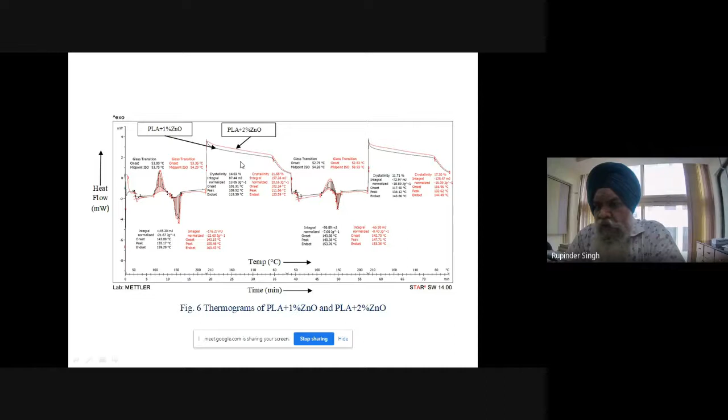Now this will be important to understand. So I printed a component like a U shape, and tried to see the effect of water as a stimulus. For 5 hours I put that material in water, and after 5 hours we tried to see what the volumetric change was. Then keeping it for 5 hours at 25 degrees Celsius, we tried to see how much change in shape there is. Basically, either this U is getting rotated into a V, or the outer face is showing inward movement.

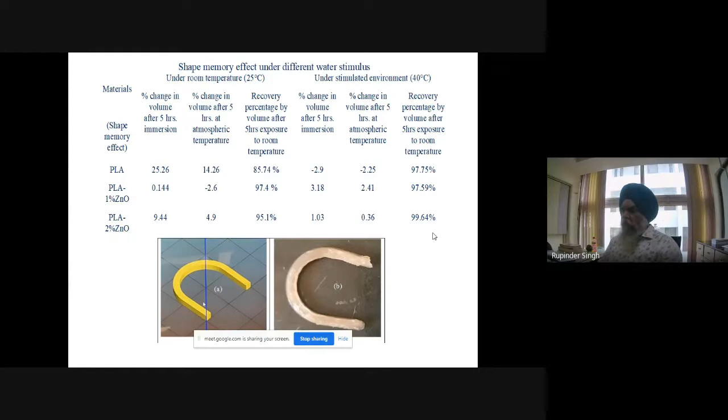So what we observed, if in place of 25 degrees Celsius we work at 40 degrees Celsius, there is a better recovery of around 99.64%. So this material is under the typical effect of a hydrothermal stimulus—the effect of moisture and the effect of temperature. So we tried to see a similar effect at low temperature and at its glass transition temperature, and we were able to get recovery up to 99.8%, and in some cases even 99.9%.

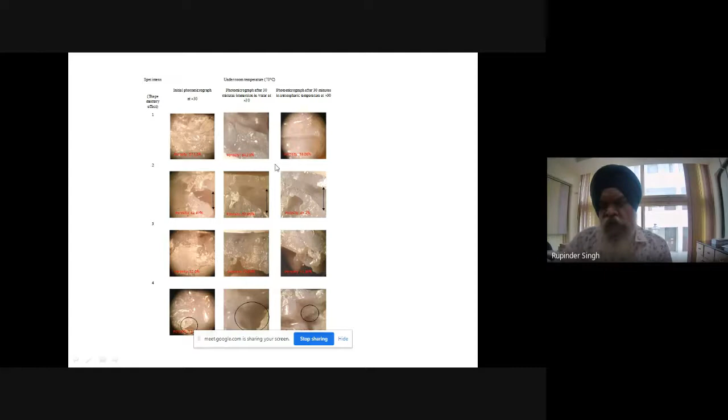So now if the material shape is changing with some stimulus, just think of that shape-changing material. You are really interested in the 4D property of the antenna, so we can change that property of the substrate. We tried to see why this change occurs, so for that purpose we tried to measure its porosity, and what we observed was a significant effect on the porosity of that particular substrate.

Before I conclude, I want to share one example of actually printing a 3D printed patch antenna. Here we try to use thermoplastic and thermosetting based 3D printed patch antennas. One typical waste material, LDPE, low density polyethylene, has been used, and we try to reinforce it with bakelite, which is a thermosetting material. Why are we using bakelite? Basically, if I add bakelite into a thermoplastic material, its thermal stability increases exponentially.

Just imagine I'm interested in making some tea in my kitchen, so I use a pan. To hold the pan, there is a handle on which some bakelite shield is there. Basically, if you heat that pan a number of times, every time the bakelite cover gets more and more strength, becoming more and more thermally stable. So if I make an antenna or a sensor with reinforcement of bakelite or thermosetting material, this is going to be thermally stable in each and every cycle, as we have seen in the DSC analysis.

So to make this type of material, we started initially with 100% thermoplastic and got an MFI of 12.2. Then we went on reinforcing with bakelite by weight percentage, and we were able to have this proportion up to 7.5%, with an MFI of 9.65. But what we observed was that with the higher proportion of bakelite, even at 7.5%, the material was so brittle that its spoolability was compromised, so we were actually not able to print that part.

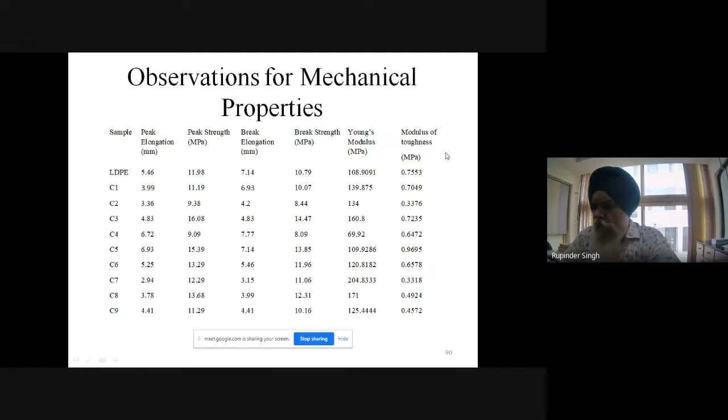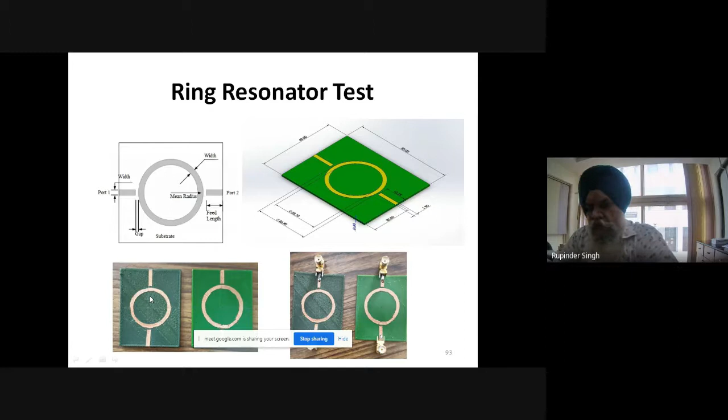So the samples were printed. Then on this face and on the reverse face, copper tape was put over there. Then connectors were attached to it. We tried to see the effect on the VNA, and we observed the first peak at 2.75 and 5.28. And once we add the bakelite into it, this peak was shifted to the right, so 2.8 to 5.72.

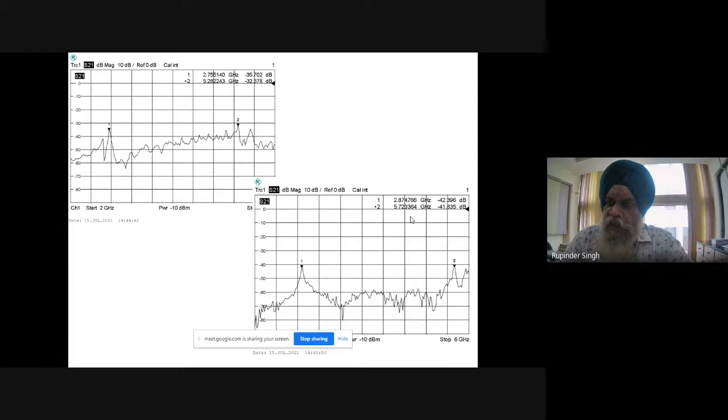Right, so we are interested in making an antenna up to 2.45 gigahertz frequency. So we selected initially the epsilon r value of 3, and using this VNA analysis we calculated that the dielectric constant of this material was coming to 2.2 and 2.0 for the combination, and based upon typical VNA analysis, we basically calculated the dimension of the patch in the form of width and length.

But we observed, once I add the bakelite into it, there was a marginal increase in the dimension. You can see earlier it was 40 and 47. Now it was increased to 42 and 49. Right? Using the HFSS, we tried to find out the performance, and we were able to get the result very close to 2.45, and even the gain was really good. This was something around 4 in both cases.

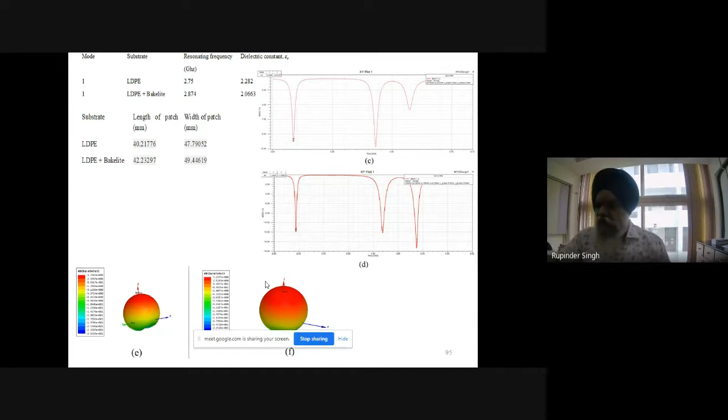But the advantage that we get with the reinforcement of bakelite was that we were able to basically increase the thermal capacity, right? The size was marginally increased by 1 or 2 mm, which is quite simple for us, right? But it can work at relatively very high temperature. So that is one of the advantages that we get out of this work. So these are some of the observations from this.